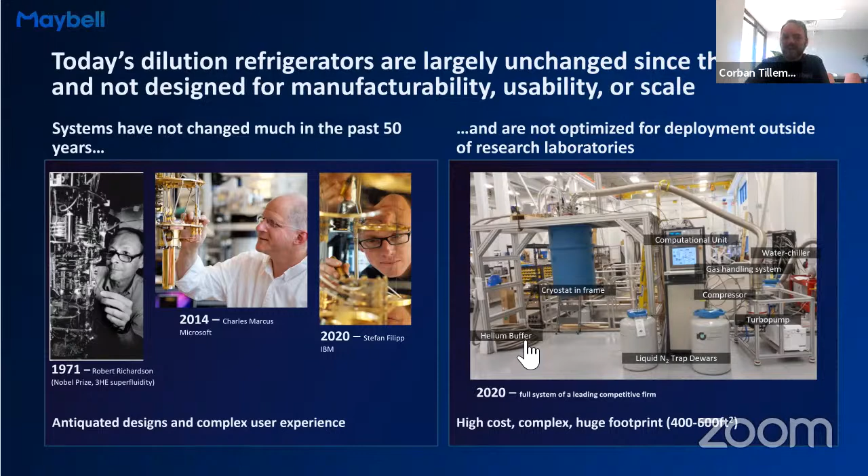And I'll pull up - lest anyone think I found an intentionally ugly dill fridge for this picture - this is at the Lawrence Berkeley National Lab, and you can see that same coil of tube on the ground. You can see this system's open, so all the radiation shields are scattered around. This is the best fridge on the market before Maybell launched - a super high-end fridge, but you can see they're a bit of a mess. By the way, this advanced test bed lab tour is fascinating, and I highly recommend anybody poke around there.

So it doesn't matter which of our competitors you're using, that fridge basically looks the same, right? You've got a big trash can looking thing, you've got the coil of tubes on the ground, you've got a tangle of wires, and you have a kit that your team puts together.

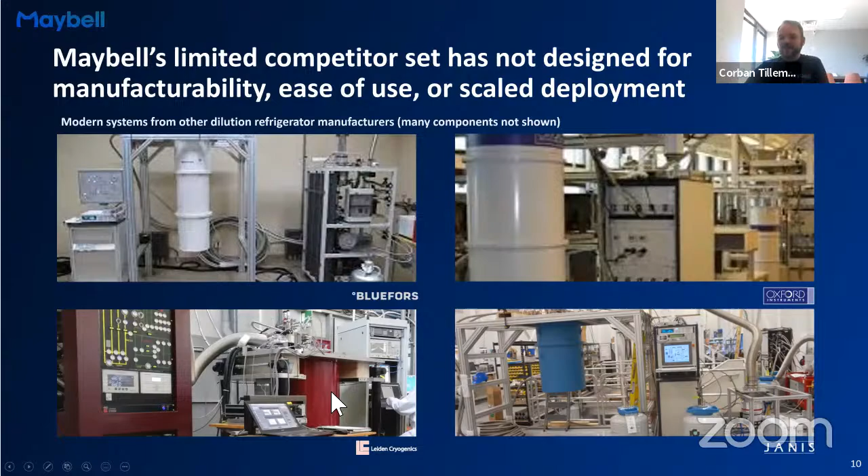What Maybell has released, and what you'll see today, although not with all the skins on it, because we're building the fridge, not using it, so we have it taken apart so that we can do some experiments on it, is a solution that is a fundamental transformation.

It is simple, scalable, powerful, designed for the future of the quantum industry, and designed to be the backbone of quantum data centers, right? Where we've taken more functionality than has historically existed in our competitors' systems, 4 times more qubit capacity, and put it into a 10th the space.

Now, all of those components that needed to exist for competing systems, they still exist in this system. It's just we've found ways to miniaturize them, to make them more powerful, more effective, more user-friendly. And the changes we've made really go from the foundation under the fridge all the way to the sample volume and to how energy is captured from the mixing chamber.

So, for competing systems, if you have a highly sensitive sample, in many instances, you'll literally dig a new foundation for the system. You have to put them on the ground floor, you jackhammer down, you dig out 10, 15 feet, you put rubber buffers all around, you pour a giant concrete pad, and you put your system on top of that in order to isolate it from the vibration of the world, right?

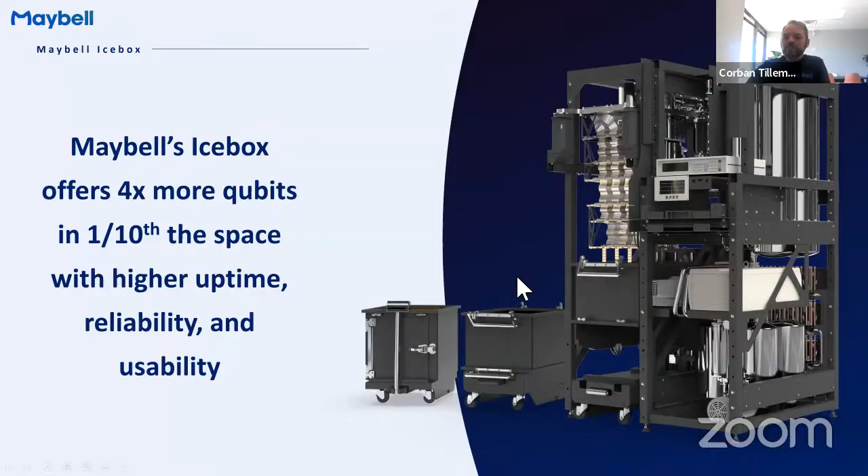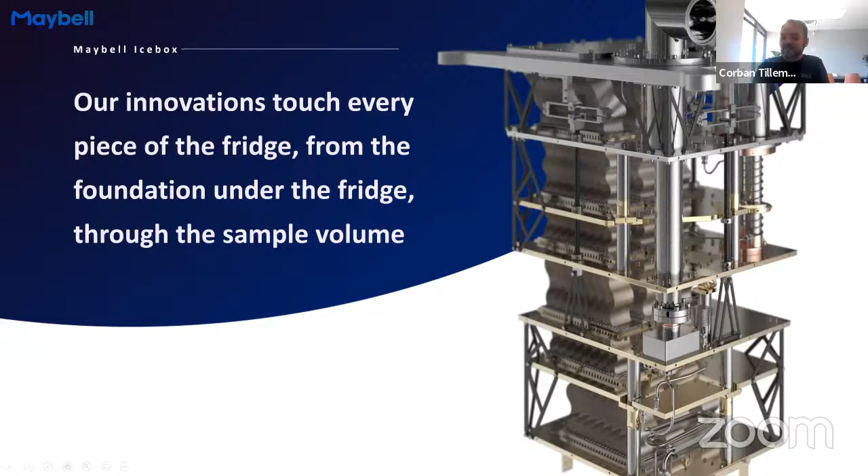We've pursued novel approaches to making the heat exchangers both more efficient and more compact, meaning we can use less helium-3, the super expensive helium that I was talking about earlier, while still getting the same base temperature and cooling power from the fridge. And we've done that in an innovation-centered way that I think startups are kind of uniquely positioned to do. So that's what we're building at Maybell.

And I'm going to stand up now, kind of walk around the lab a little bit, introduce you to the team a tiny bit, though they're going to be pretty busy. And then we'll stop and answer questions as they come up. But you'll see it's not a big lab, it's not a big place.

So let's see, I'm going to try turning this around. And this is the brains of the operation, where the team is actually doing the work.

And most of our team, like we have a few physicists. Jenny's a hardcore physicist, and Kyle, wherever he went, is a hardcore physicist. But most of the team is engineers, designing and building the system, making it more customer centric, making it so that it is easier to use.

We have a lot of chemistry that goes on. This room is all about chemistry, working on novel heat exchanger technology. These are, actually, I probably shouldn't show that.

I'm bad about that. And then we have our shop, our lab, where we have quantum wiring that we are developing in-house. We have a whole bunch of prototyping equipment, big lathe, big mill, big 3D printer that we use for kind of rapid prototyping.

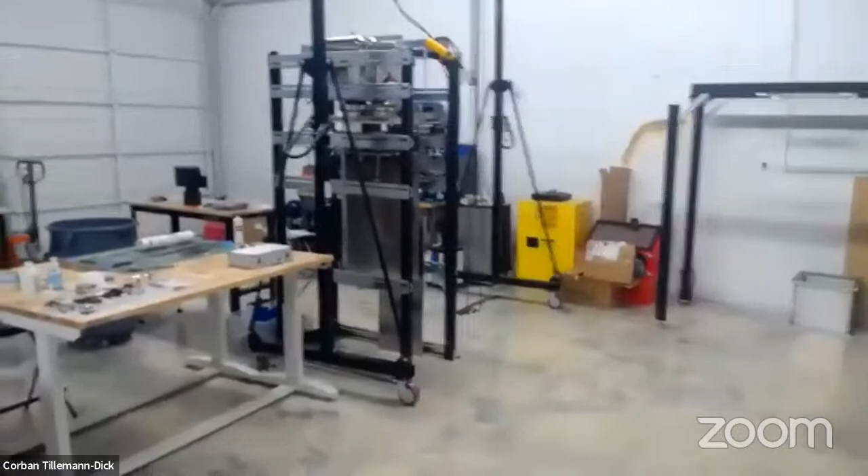And that was the alpha system, which did its job. It taught us what we needed to know from that one. And this is the beta system that is turned on and happy right now.

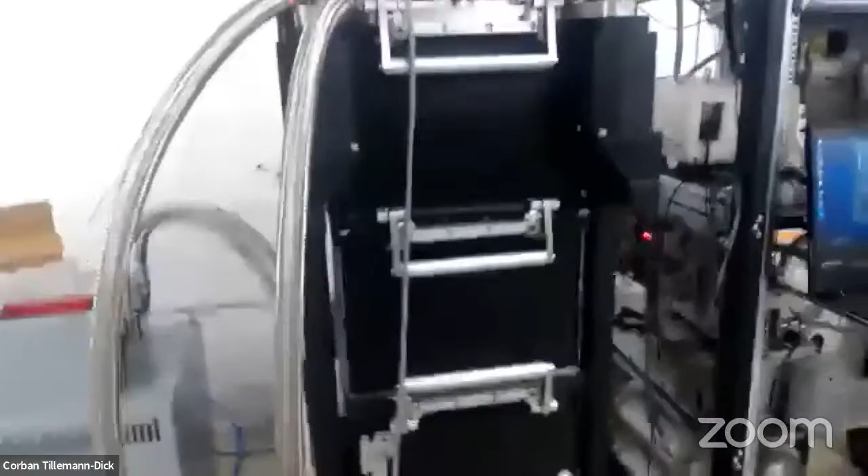And the entire multi-room setup that we were looking at in the other lab is for us, these two racks. Today it's actually a little extra messy because we just put in a brand new pulse tube to see how that works, and so far we're pretty happy with it. If anybody from Cryomech's on, we think they've done a very nice job on that. And then this rack here, which we call rack 2, is where the pumps, the compressor, the gas handling system, and all of that go. Usually that is inside that pretty box there, but for ease of access for us right now, that is what we've done.

And that's it. That's the team. That's what we're doing. And we've been able to drive incredibly rapid innovation by being small and focused on customer needs, and focused on really listening to our customers, understanding what they want from their systems, where their pain points are, and how we can address them.

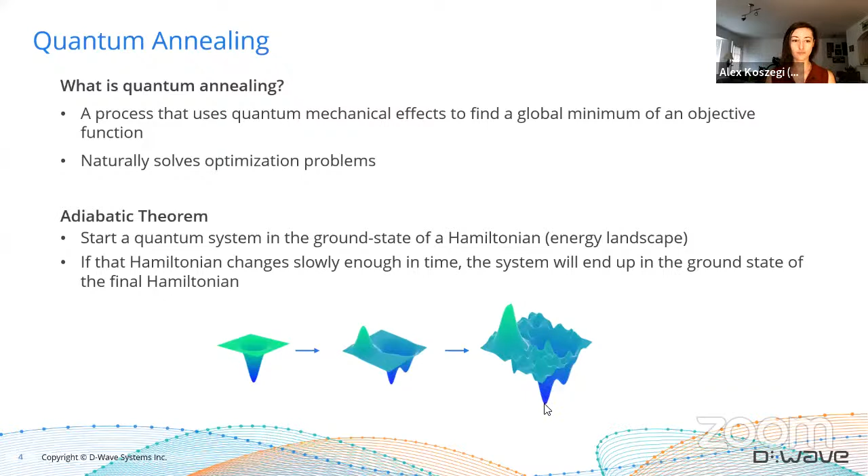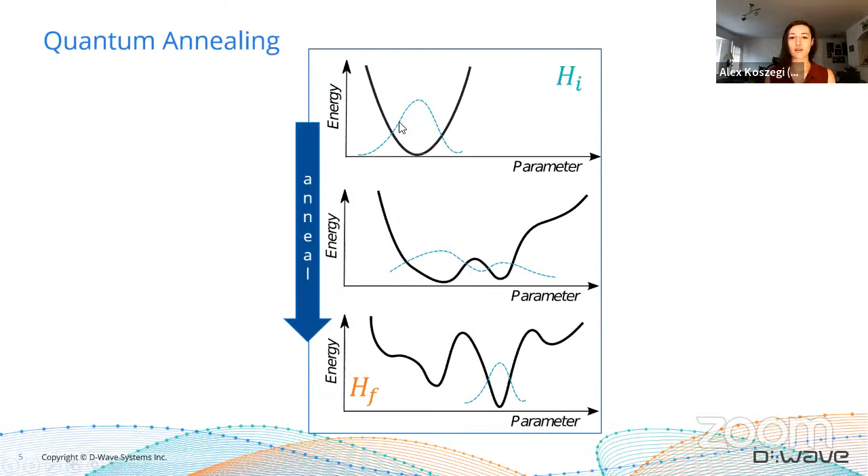Now we're going to look at this process in more detail. The plots I'm showing here are just a 2D representation of what we saw before. The black curves represent the energy landscape we saw in the previous slide. This blue dotted line represents the wave function, indicating the probability that our quantum system is in any particular state at a given time. At the beginning of the anneal, there's just a single global minima, and our wave function is concentrated around this global minima, so there's a high probability we're in this state of superposition, this ground state.

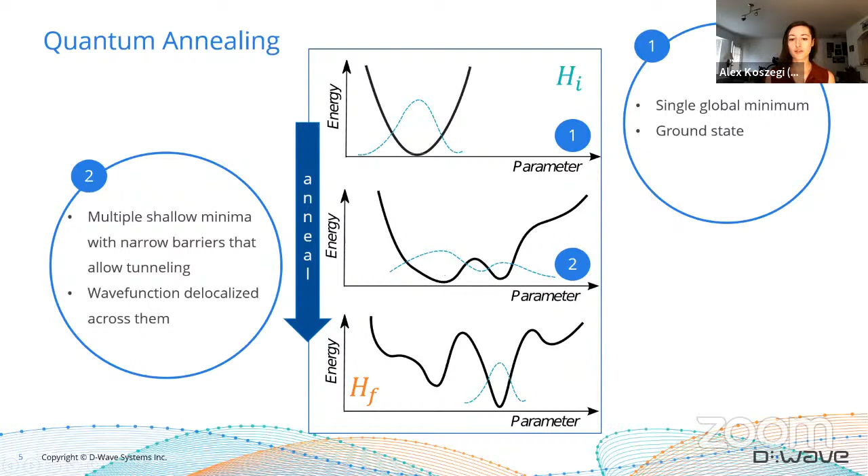As we progress through the anneal, remember that our energy landscape is going to start to morph or transform, and with that we get multiple shallow minima, like you can see here. As this happens, our wave function is also going to broaden or delocalize across the minima, so now we have some probability that we could end up in any of these minima. This is where a lot of the quantum dynamics or mechanics are occurring, things like tunneling to find or stay in the lowest energy state.

As we continue, our energy landscape becomes more complex and more defined, and the wave function also starts to localize around the global minima again. At the end of the anneal, we're now in a classical spin state, so we can read out the spins of our qubits, and that becomes the solution to our problem.

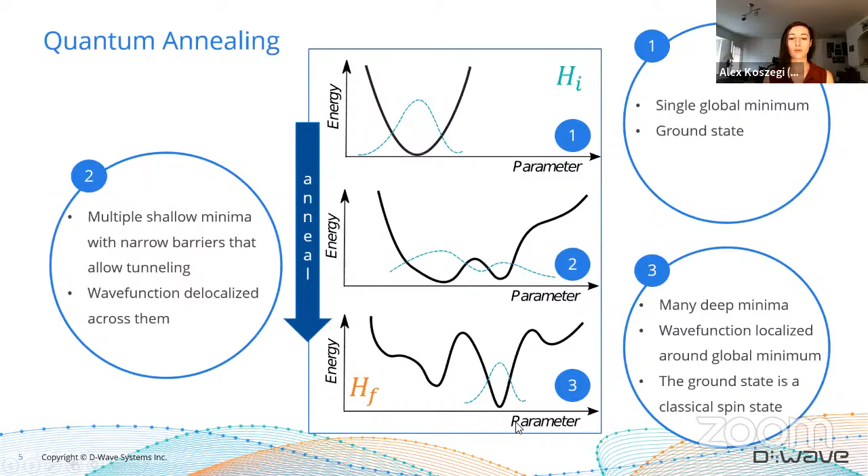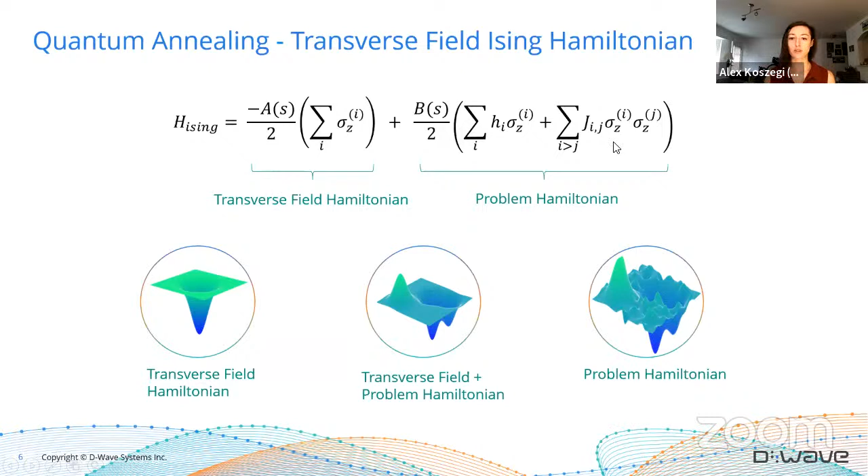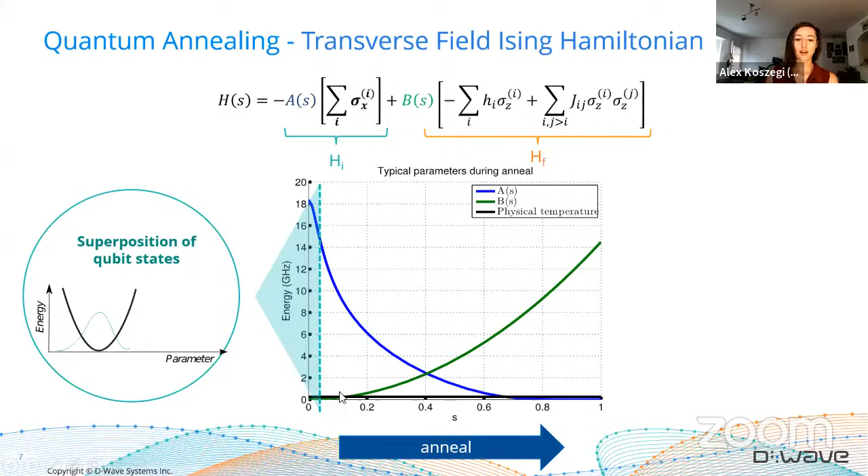This blue curve represents our initial Hamiltonian - we'll call that A of S. This green curve represents our problem Hamiltonian, or final Hamiltonian, represented by this B of S term. At the beginning of the anneal, all of our qubits are in superposition, and we have an energy landscape that looks like this. This makes sense because our A of S curve is fully on, so it has high energy at this point, whereas B of S is set to 0, completely turned off.

Then we start to progress through the anneal, turning off A of S while we turn on B of S. It's worth noting that there's a fixed relationship between A of S and B of S at any point in the anneal. Though the anneal schedule can be modified slightly, the one thing that can't be modified is this relationship between A of S and B of S. It's fixed.

As we approach the point where the curves meet or cross over, this is where a lot of the interesting quantum mechanics happens that applies to the problem Hamiltonian - a lot of tunneling. As we continue beyond that point, our qubits start to freeze out or collapse into a classical state, until we reach the end of the anneal at S equals 1, where all of our qubits are in a classical spin state, and we can read that out.

Okay, so we've talked about quantum annealing at the global level. Now let's take a look at how quantum annealing impacts an individual qubit in terms of its energy landscape. What I'm showing here is a representation of the energy landscape of a single qubit at the end of the anneal - when the qubit is fully characterized by this second term in the Hamiltonian.

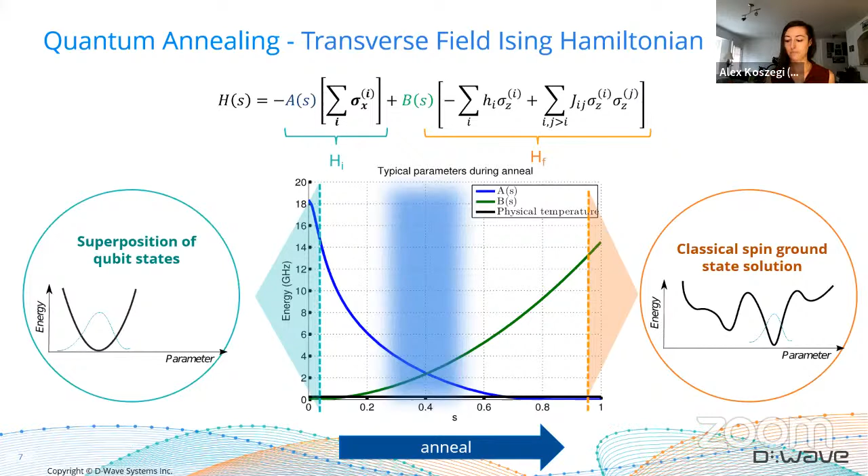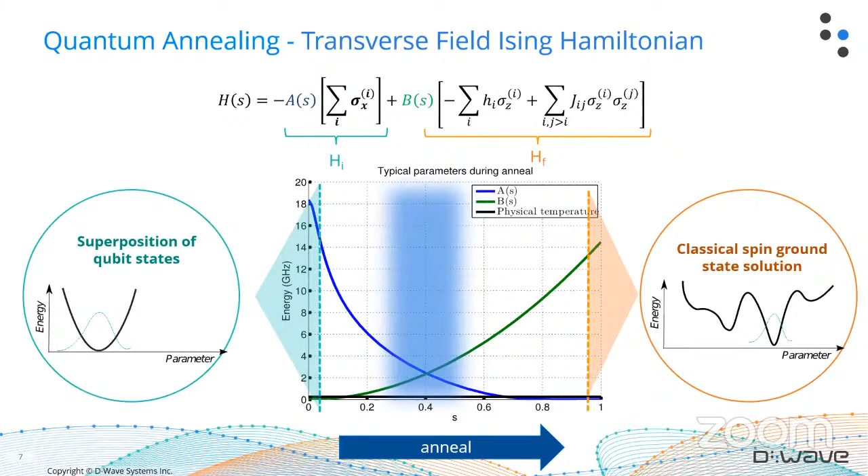Okay, so now let's talk about how we physically implement our qubits and our couplers.

We use superconducting flux qubits at D-Wave for our qubits on our processors. They are RF SQUIDs, so we can think about them in their most simplistic terms as being just a loop of wire that has current flowing through it. If you remember from an electricity and magnetism course, if you have a loop of wire with current flowing through it, you get a magnetic flux through the center, either pointing up or down, depending on the direction the current is circulating, according to the right-hand rule.

Now we use superconducting materials to fabricate our qubits, and the reason is that superconductors have a few really interesting properties when cooled down to a low enough temperature. One is that they have no resistance, so current flowing through a loop can flow forever with no power dissipation. The second property, more relevant here, is that you actually get current flowing in both directions at the same time, creating a state of magnetic flux pointing up and down through the qubit simultaneously. The flux doesn't cancel out, and it's the direction of flux through the qubit that we use to indicate its state.

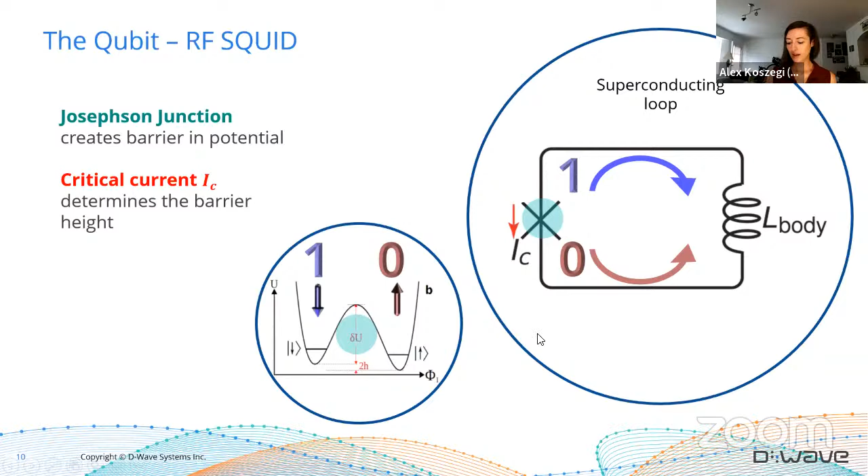Now if we leave our qubit as is, we have a fixed barrier height, so with this circuit we can't tune the barrier or move it from 0 up to this fixed height. The way we get around that is we replace that Josephson junction with a loop that has 2 junctions in it, like this. This is called a compound Josephson junction, and it enables us to raise or lower the barrier height by applying a flux to this loop. That allows us to change the effective critical current through the junctions, so by changing that effective critical current, we can change this barrier from 0 all the way up to some height.

The other parameter that impacts a single qubit is the linear bias, the H value. We physically implement that H value by applying a flux to the body of the qubit, and that flux can either bias or set a preference for that qubit to be in one well or the other.

Now, the last thing we talked about when we discussed annealing was the J parameter, that interaction or relationship between qubits. The way we implement that is with another qubit-like device. You'll notice it looks very similar to a qubit, it's just fabricated with different parameters, so it'll have a different IC, a different inductance in the loop, and a few other parameters that allow us to operate it as a monostable RF SQUID. By operating it this way, it creates a tunable mutual inductance, so we can apply a flux to this loop, or to the coupler, and that creates an inductance, or mutual inductance, between the 2 qubits connected on either end.

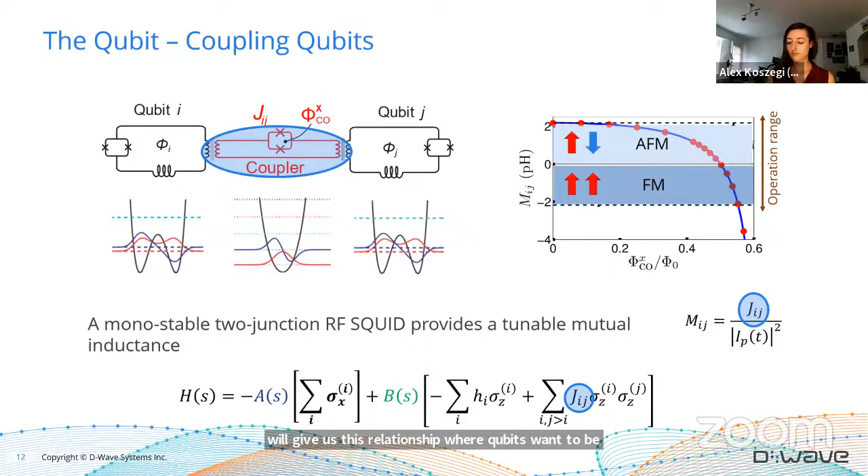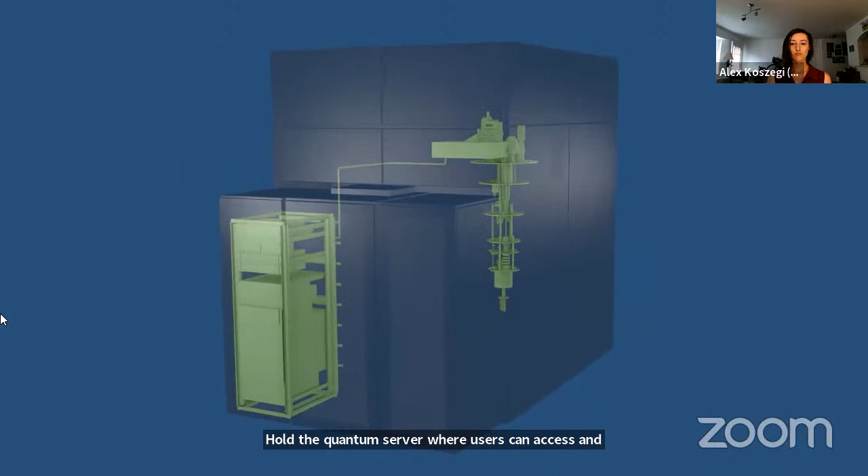The main room behind us houses the quantum processor, and the data racks in the front hold the quantum server, where users can access and program the quantum processor. The other data racks include the cooling system, which includes pumps and is responsible for the chirping sound you can hear in the background.

Inside the room, before we get to the quantum processor, there are many layers of shielding which allow us to create the low noise magnetic environment the chip sits in.

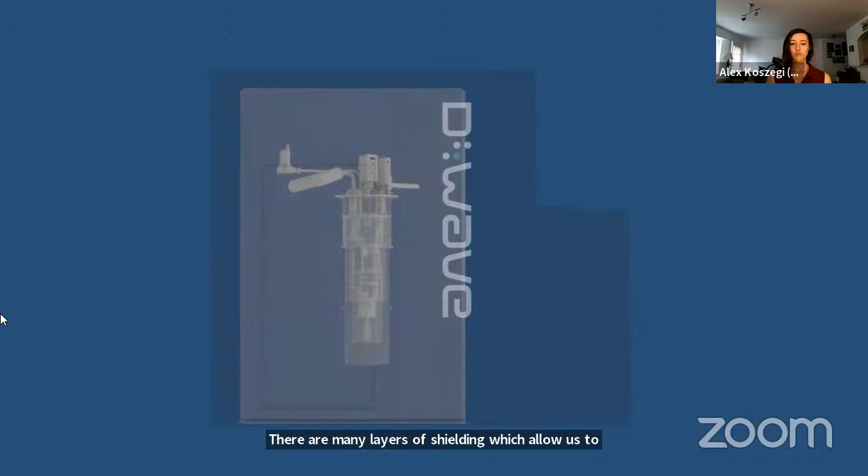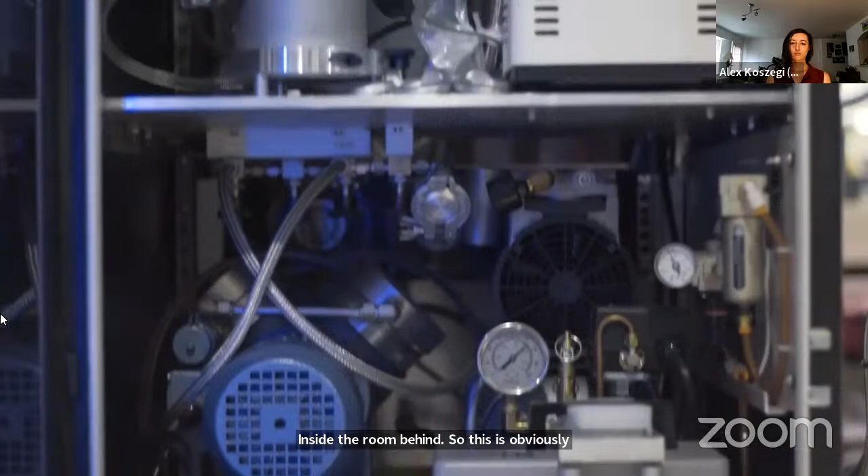If you look inside the data racks, you'll see that they don't contain what you would normally expect. So here we have some scroll pumps, which are mechanical parts associated with pulling vacuum on the fridge inside the room behind. This is obviously highly unusual for a data rack, but has been integrated so that it wouldn't look out of place in a data center.

And in fact, the requirements for running the system are consistent with all the services that would be available in a data center, which would include chilled water and power predominantly.

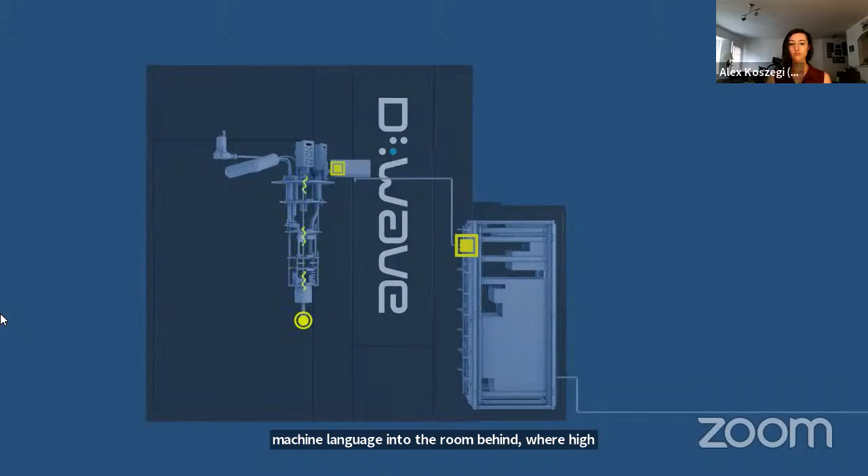In this rack is the quantum server, which allows users from anywhere in the world to interact with the processor itself. This server is receiving information from users, converting that into the machine language of the processor, and sending that machine language into the room behind, where high-precision analog electronics will convert those signals into electrical pulses, which are sent through cables into the refrigerator and down through the cooling system to the ultra-low temperature of the processor.

It executes its problem, and then data from the processor is returned to the server and returned to the user. The system is very flexible, and users can be programming in whatever language they're comfortable with, interacting with it either with this system in their data center or even here in D-Wave's lab.

The quantum bits in our processor store information in the form of little magnetic fields. The 0 and 1 correspond to a little magnetic spin. The controls over the qubits are all in the form of magnetic fields. So the quantum processor is very sensitive to magnetic noise and the magnetic environment that it sits in. In order to keep that magnetic environment really low, as well as support the ultra-low temperature that it's operating at...

This system behind me has about 16 layers of shielding between where I'm standing and where the chip sits at the center. These black panels are really for aesthetic purposes, and they integrate these data racks with a shielded room, which is the first of those layers of shielding, and is filtering out RF signals.

So if you were to stand inside the room and close the door, your cell phone would stop receiving a signal. The fridge itself has a combination of radiation shields as well as magnetic shields, which help support the ultra-low temperature operating environment and achieve the ultra-low magnetic field.

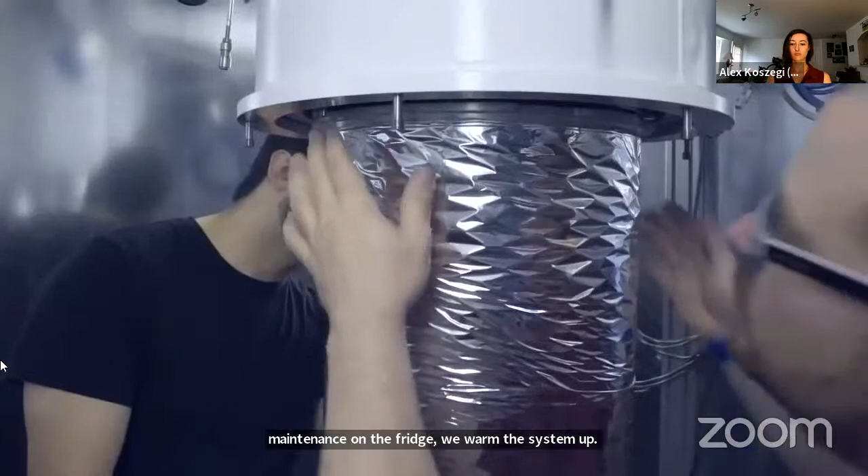When we want to swap the processor or conduct maintenance on the fridge, we warm the system up, we remove these shields, and then the processor is accessible, as well as all of the internals of the refrigerator.

My name is Murray Thom. I'm the Director of Professional Services at D-Wave. I talk with our customers and partners about what quantum computers are, what kind of problems they solve, and work with them to develop software that uses quantum computers.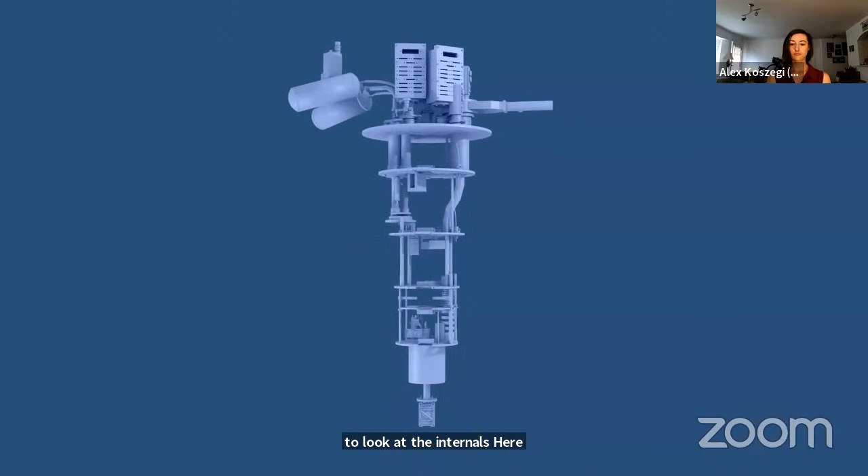We're standing inside a quantum computer, and you may know that the quantum world is delicate. It's easily disturbed, so there are many layers of shielding in this system, which we've removed in order to look at the internals here. A traditional supercomputer may have many thousands of processors in it, but in this quantum computer, there's only one chip, located right down here.

When you send an instruction to the quantum computer, a delicate quantum calculation is taking place on that chip to produce your solutions. The system we're looking at here is an ultra-low temperature cryogenic fridge. Because it works at such low temperature, we use the Kelvin scale to measure how cold it's getting. In the Kelvin scale, a warm room is like 300 Kelvin, and 0 Kelvin is the lowest temperature that can be reached. Physicists refer to it as absolute zero.

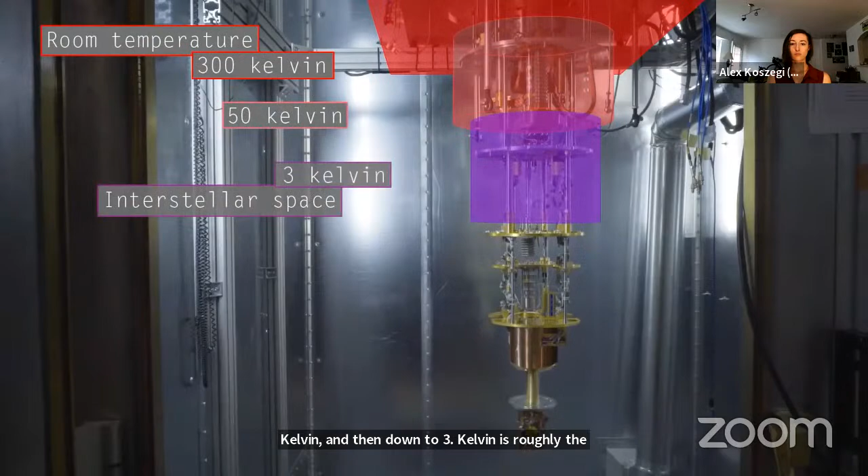There's two levels of cooling in this system. The top one is a pulse tube refrigerator, which takes us from 300 Kelvin to 50 Kelvin, and then down to 3 Kelvin. This is roughly the temperature of interstellar space. Then a second refrigerator, a dilution refrigerator, takes us in this plate from 0.7 Kelvin, 0.1 Kelvin, and then down to 0.01 Kelvin. When the system is operating, this plate and everything mounted below it is 10,000ths of a degree above absolute zero, which is more than 100 times colder than interstellar space. This whole system is designed to sustain those low temperatures in a continuous cycle.

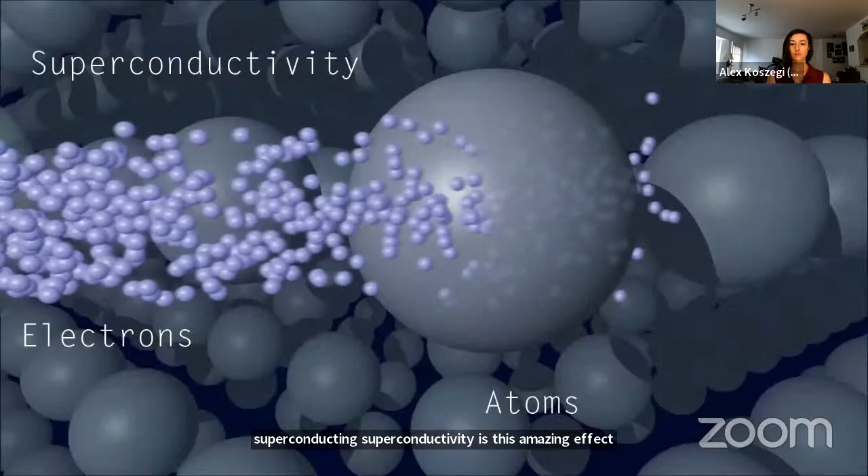When you send an instruction to a quantum computer, the signals pass down these wires along the sides of the refrigerator. At this point, there's a break in the wires where all the signals become superconducting. Superconductivity is this amazing effect where you can send electrical signals without any resistance whatsoever, so the electrons aren't even interacting with the atoms in the wires around them. That's great because it means that this portion of the system has no energy dissipation, it produces no heat. But it also means that we can't rely on the wires to cool the electrical signals and eliminate their noise, so we have a custom filter bank mounted here which cools those electrons.

An important aspect of the superconductivity is that these signals and the quantum processor unit consume virtually no power, whereas the supporting systems around it consume about 15.5 kilowatts. This remains the same regardless of which processors are installed at the bottom. If you were to take a fully populated server rack out of a traditional supercomputer, it might consume 10 times that much power. So for our first customer, Lockheed Martin, when they upgraded from their first chip to the D-Wave 2, they saw a relative performance improvement on the order of 10,000 times, but the power consumption for the system was the same.

Hi, I'm Mark Johnson. I'm a scientist at D-Wave Systems, and I work with a team of other scientists and engineers developing the superconducting integrated circuit chip that's at the core of our quantum annealing processor.

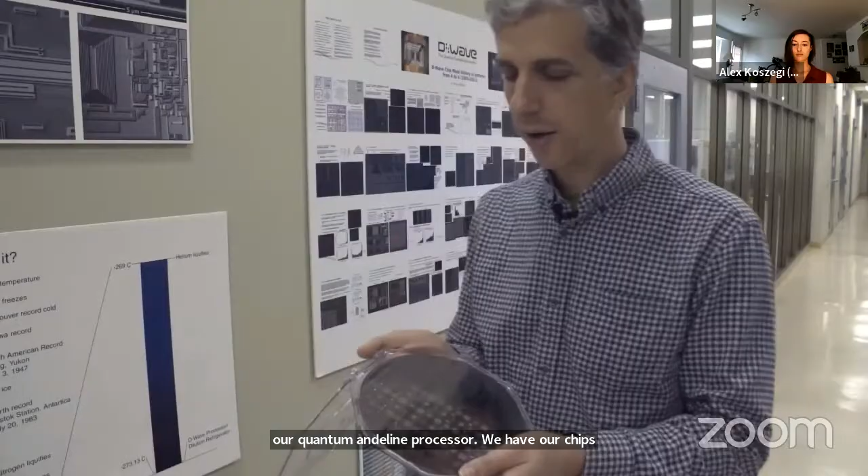We have our chips fabricated on 8-inch silicon wafers, and when we receive them back from the foundry, they look like this. Here, if you look closely, you'll be able to see a repeated array of squares that are multiple copies of our integrated circuit chips. That integrated circuit chip is really just a series of metal layers, predominantly, which you can see in cutaway here. The process that goes into fabricating this integrated circuit chip is actually not that different from that which goes into making the chip that drives your cell phone or your laptop.

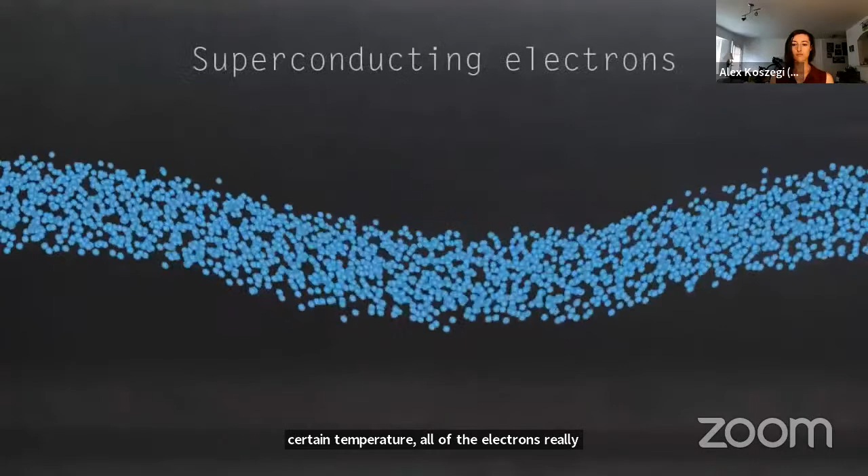One of the principal differences, though, is that these metal layers are actually made up predominantly of niobium, and niobium is chosen because it's a superconductor. The thing about a superconductor is that when you cool it down below a certain temperature, all of the electrons really collapse into the same quantum state. They cooperate with each other in the way that electrons in a normal metal don't. Now, ordinarily, quantum mechanics only exhibits on the scale of atoms, electrons, or photons. Superconductors are unique in this way in that you can see quantum behavior on a much larger scale. And it's these quantum mechanical properties that enable us to use these materials to make our quantum processor.

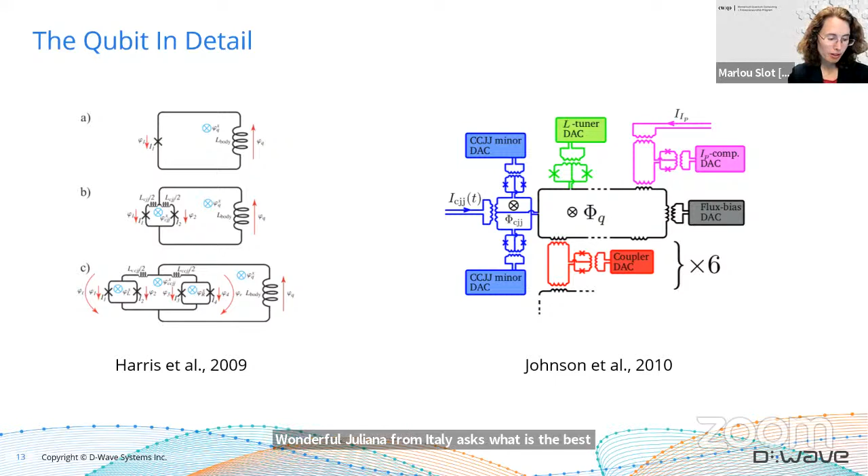Wonderful. Juliana from Italy asks, what is the best strategy to represent a complete graph on your hardware? She also has a more detailed part of the question, but please go ahead first.

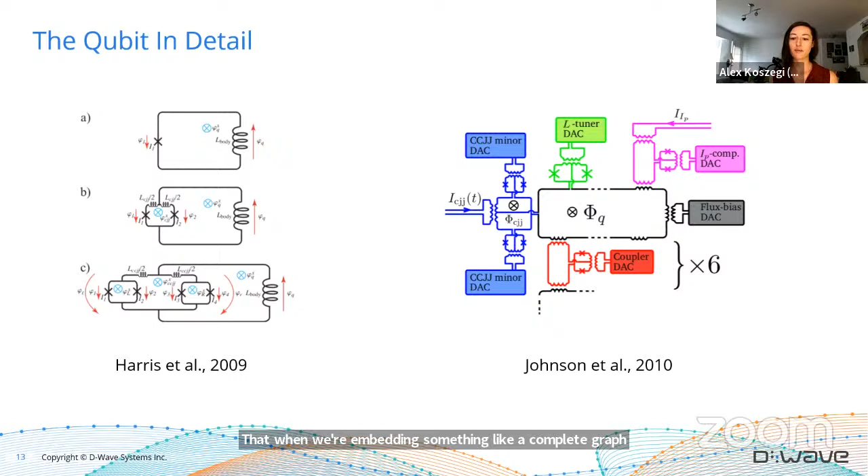Okay, so we'll see in the next section that when we're embedding something like a complete graph on the chip, we have to go through a process called embedding. So that's like what Marlou said, where we can group qubits together to represent a logical variable in the problem. We have specific embedding tools to get good quality embeddings for cliques, a fully connected graph, and we also have more general embedding tools for other sparser graph layouts. Embedding is the key there, and we'll see that in a little bit.

Great, and look forward to hearing more soon. David from the US asks, there is of course always this question, what are the limitations of D-Wave computers? Can D-Wave solve problems besides optimization? Yeah, that's a good question.

Quantum annealing is really suited to optimization problems and some kind of quantum simulations. There are other gate model computers that are better suited for other types of applications involving differential equations, computational fluid dynamics, or quantum Monte Carlo simulations. There's a whole other category of problems better suited for gate, but annealing tends to be the best choice for optimization problems, even compared to QAOA.

And Marlou, if I'm not mistaken, you are working on gate model-based computing now at D-Wave, so D-Wave has decided to go for both strategies, perhaps depending on the application. That is true, and as Alex said, the main reason is that there are certain types of problems that suit quantum annealing better, and certain types that suit gate model computation better. That's why D-Wave decided to continue with both models, so we will be able to solve a wider range of problems that come to us from customers.

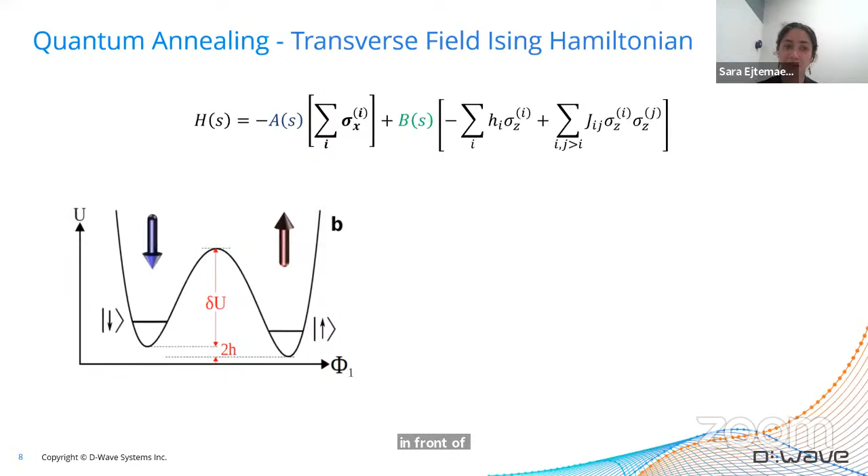That is the, so we are tuning that quantum term, which was the time-dependent coefficient we had in front of it. So all of those terms have a time-dependent parameter that controls their amplitude, and by controlling that amplitude, we can change it.

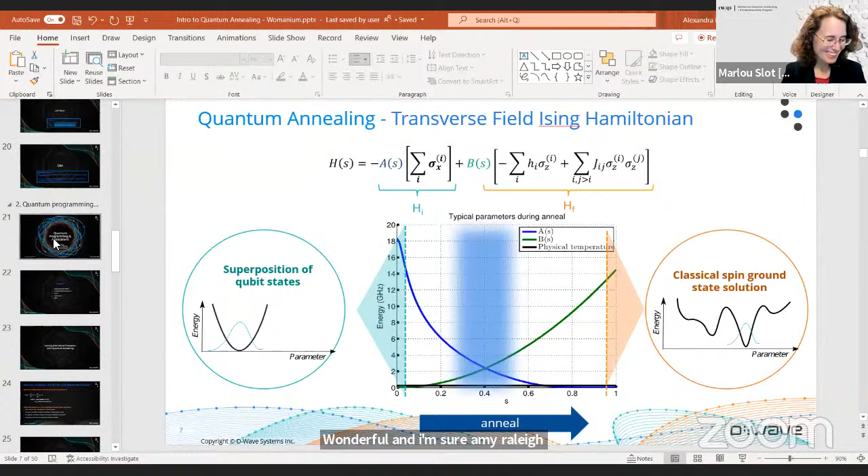Wonderful. And I'm sure, Amirali, if Alex and Sarah have time to stay, you will have many questions and discussions for them. Please go ahead with the next part, quantum programming and applications. Great, thanks, and you can see my full screen presentation mode. Yeah, okay, sweet.

Next I wanted to connect what we learned about quantum annealing and the chip itself to how we might use a quantum annealer to solve an industry application. We'll talk about the model we use from an application perspective, go through an example of the problem formulation process, show a demo of our cloud platform, and wrap up by talking about a few applications, though there are many more. I have more links you can explore later in the slide deck.

Given what we know about quantum annealing, how would we use a quantum annealer to solve a real world problem? We've spent maybe an hour talking about quantum annealing, but to use the QPU, we've tried to design our system and software tools so that you don't need to know the physics to use it to solve problems.

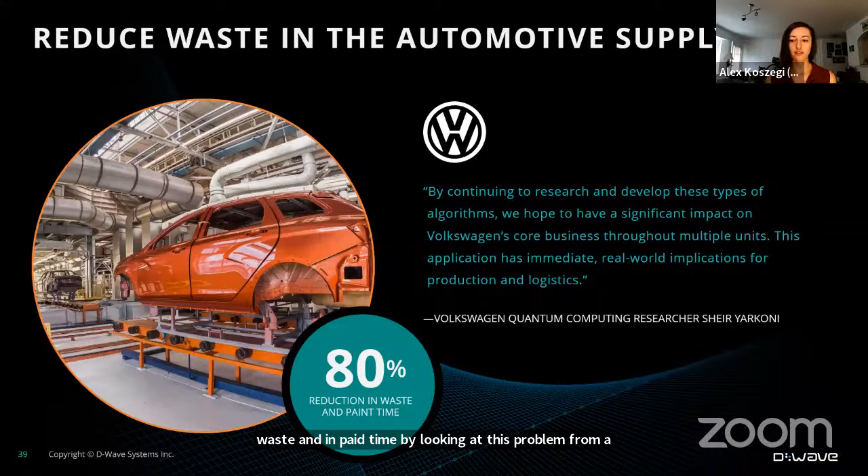Volkswagen was using just a greedy algorithm to solve this optimization problem. But the problem with that is it results in a lot of waste and a lot of color switching. Switching colors results in waste because you have to flush the line every time, which involves time, wastes material, and is bad for the environment. So there are a lot of reasons you want to reduce the number of color swaps. When they used a quantum annealing processor to optimize this process, they were able to achieve an 80% reduction in waste and in paint time by looking at this problem from a global perspective rather than a greedy one.